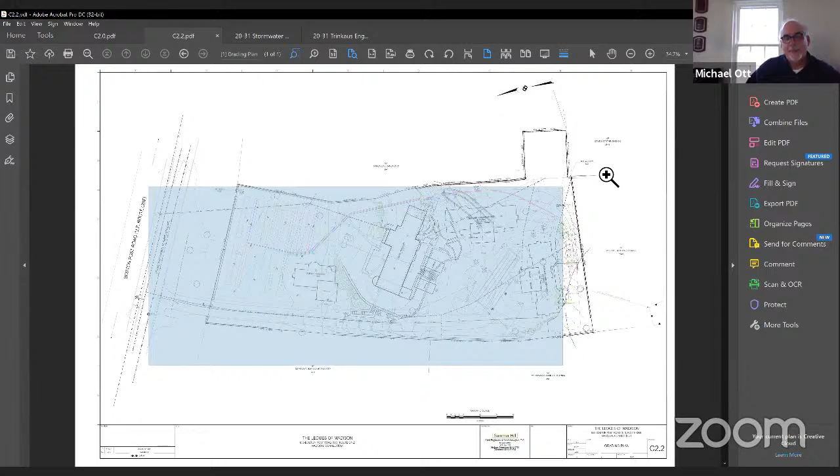So the proposal is, and again I'll do this as quick as I can, to widen the existing driveway, which varies in width from 9 to 10 to 11 feet today. The proposal is to widen it to 18 feet, with a 2-foot reinforced shoulder on the east side, the internal side to the parcel, to accommodate emergency service responders, specifically fire apparatus, in their operations.

This is not the cleanest drawing to look at, but the proposal is to renovate the existing estate house, removing a good portion on the east end — the project architect can explain how much. The footprint won't otherwise change, and the renovation will create 2 residential dwelling units inside it. A new building will be constructed out front with 1 residential dwelling unit, and 2 new identical buildings will be constructed in the rear to the south, each with 2 residential dwelling units. The garage apartment building will also be removed.

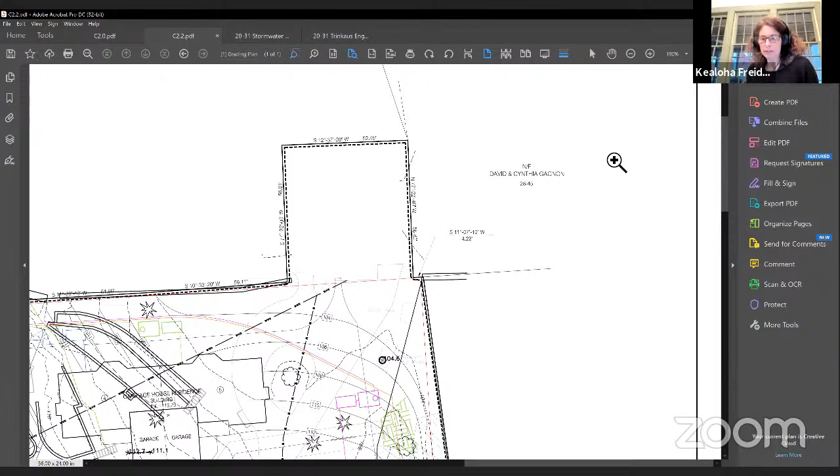Yes, absolutely. If it's as close as 60 feet, it would extend onto the property some 40 feet. We can't tell the exact extents of whether it would be an arc or what area it would cover.

Let me shift to a different sheet. Hopefully you can see the outline of the existing garage. Okay, so we know that you're absolutely correct.

Because we don't know where the limits of the wetland are exactly, we don't know where the limits of the 100-foot upland review area are. But it's very clear that at a minimum, a portion of this building is within the 100-foot upland review area. In addition, a portion of this pavement out in front of the building is within the 100-foot upland review area. That's the existing plan.

If I switch to the proposed plan, we know that the landscape architect has proposed, when this building comes down, a community garden and seating area in here. Certainly a good portion of the demolition of the building and its removal, and then the construction of the seating, garden and seating area will be within the 100-foot upland review area.

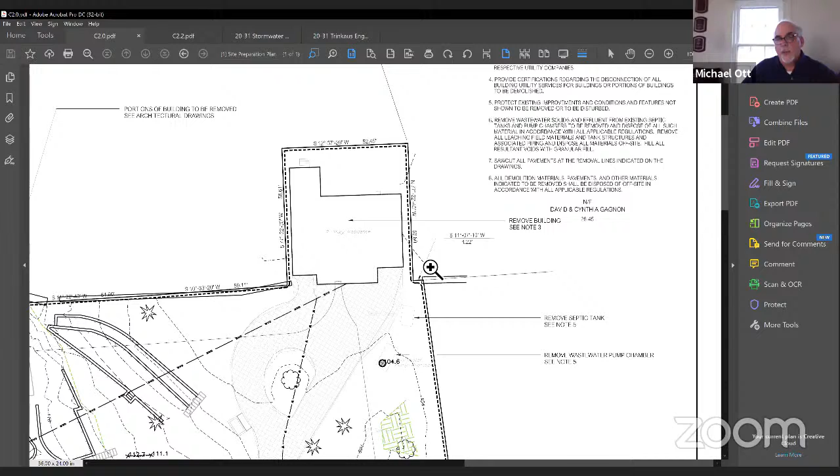In addition, let me go back and switch, it's easier to see. This pavement drains roughly in this direction, and surface water runoff from it also heads toward that wetland on the adjoining property.

In the proposed condition, and I talked about this in the stormwater management report, we're removing this building, so we're removing this impervious surface, and constructing a community garden and seating area. I'm quite sure the landscape architect has said the entire surface area will be permeable. We're also removing the pavement out in front of the building and turning it into lawn, removing that impervious surface too.

What we're doing is taking the closest impervious surface to the wetland, which we estimate at 60 to 70 feet, and that's the building. We're removing it and the pavement, pulling that impervious surface back so under the new proposal, the closest impervious surface would be this portion of the building, roughly approximately 130, 140 feet from the wetland.

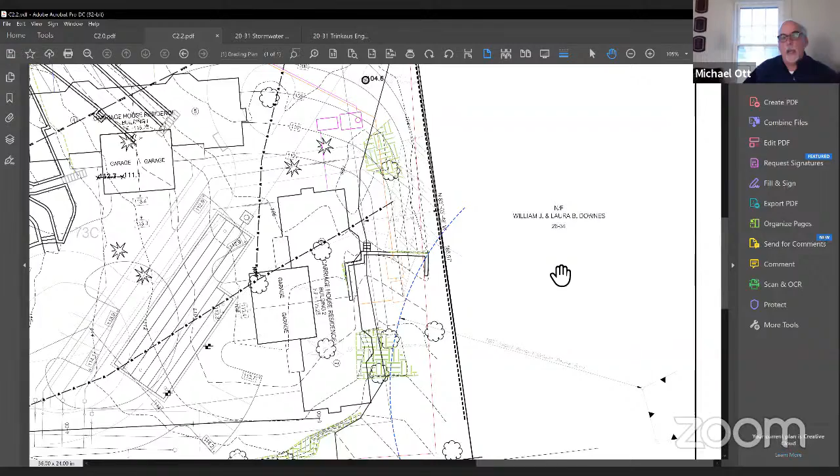The remainder of that I'll leave to Rick Hosley and Dave Ward. But I wanted to make clear that now that we have this detailed survey and have been out in the field taking measurements, we've laid out the corners of these buildings to see exactly where they fall, and shot elevations to see where the first floor will be and where the bottom of the footing will be. We know this rock outcrop is not touched, and the amount of rock that has to be removed is much smaller than we had estimated.

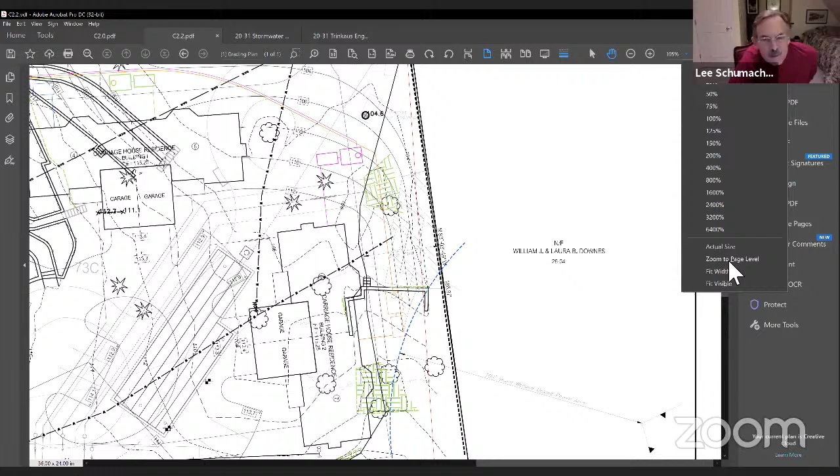Mike, this is Lee, and I apologize, I wasn't on the site visit, and I think I may have asked this question 2 months ago. Where does the water drain? How does the water drain in that southwest corner now?

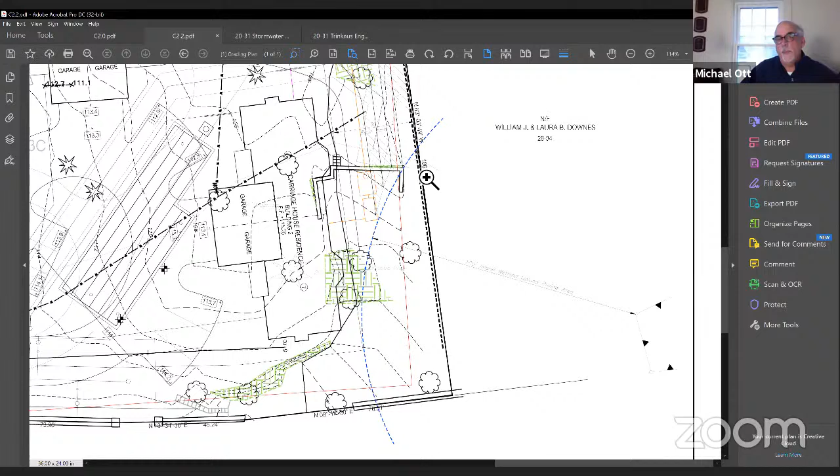Best I can tell, Lee, if you can see these ground surface contour lines, these dashed lines, surface water runs perpendicular to them. So as you can tell, it would drain as I'm tracing with my cursor, in that direction. I guess that would be southwesterly. Can't tell you what happens on the adjoining land because we don't have topography, but as you can see, we've called for a sediment control barrier at the property line during construction and until any disturbed ground up here has been stabilized. Thank you.

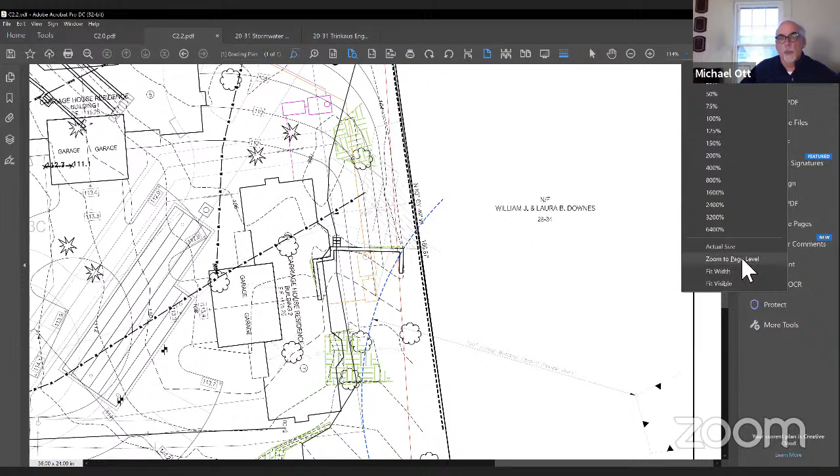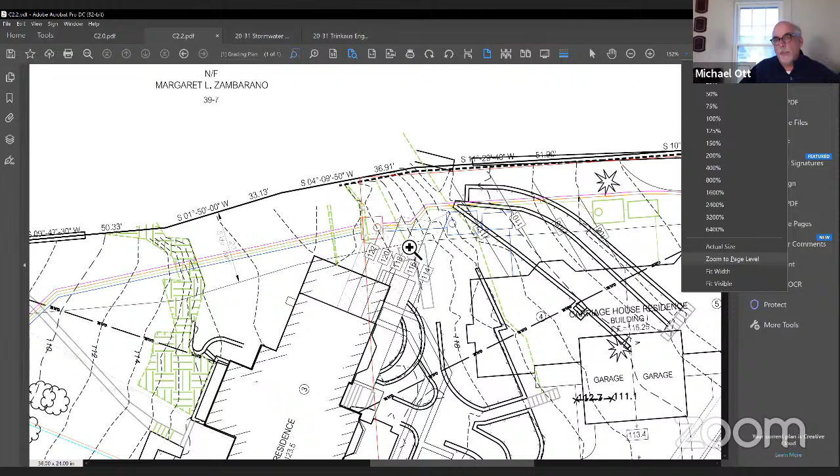So let me talk about the last area of rock removal, up at the east end of the building. We do not think it has any potential to adversely affect wetlands, but I'll leave that to Rick Hosley and David Ward also. This rock removal is to get the wastewater effluent force mains, junction chamber, and gravity lines down to the leaching fields in the front. We spent a lot of time up here taking measurements and looking at this, and Rick will speak to this in more detail later.

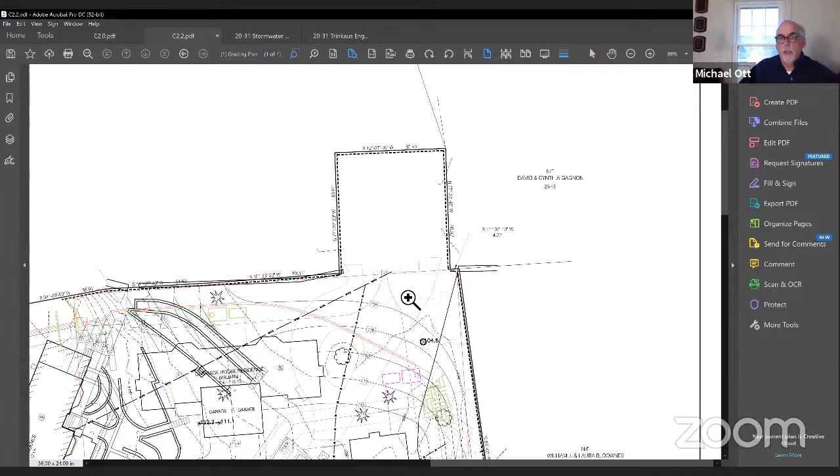I think we've covered the work required here at the southeast corner of the property with regard to this off-site wetland. The last thing I wanted to talk about is stormwater management. I mentioned it briefly, but I'll talk about it in more detail. So before I do that, any other questions?

Well, I have a question. This is Tom. On the southwest corner, we're talking about an area where there's going to be rock removal. There's a large tree right on the borderline - is that tree going to remain, or could it help stabilize the ground?

It's inside the blue 100-foot marker. I'm glad you brought this up. We looked at the trees, and maybe Rick Hosley can help me. We counted them and determined that 6, maybe 7 trees would have to be removed. I believe this one can stay, as well as 1, 2, 3, 4 - that makes 5. These 2, plus the 3 in the building, of course - it seemed to me there was 6 or 7. A couple of them were not in good shape, also as we stood there and looked at them. So it's a half a dozen or so trees that would have to come down. Thank you.

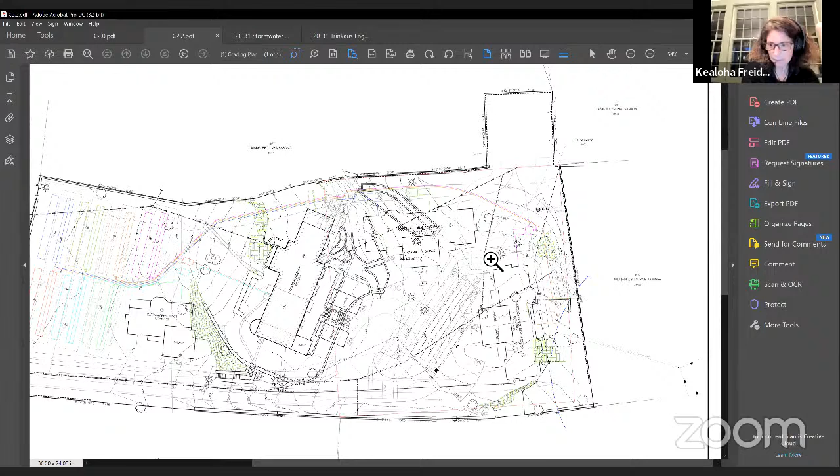Okay, I have a quick question, Mike. For your galleries, are you sure you can put those all in? I know you've done test pits, but is there enough space for what you've sized? Because there's bedrock and ledge there, and I'm sure you haven't dug test pits all over the place, but what would happen if you encountered bedrock and couldn't put all of those galleries in? Right, so good question.

I think we've done enough test pits. What we haven't done is a good enough job documenting exactly where they are. We will do that, but I feel comfortable being able to construct the galleries where we show them. A good portion of them, just like Carriage House number 2, will be located in fill. That fill has to be chosen carefully and placed carefully. These drawings are permit drawings, not construction documents, but that fill material has to be chosen carefully and placed properly. A good portion of these galleries are in fill, which actually elevates them - the bottom is above the existing grade for a good portion of them.

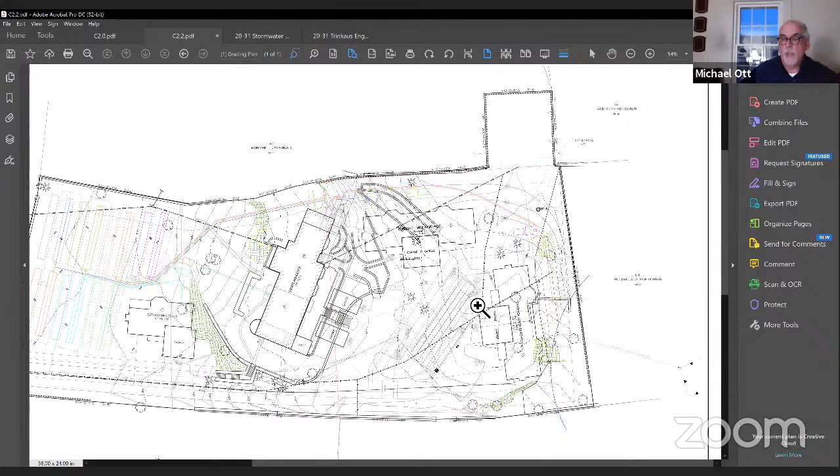So what would happen if we ran into a spike in the ledge, a knob of rock that comes up unexpectedly, somewhere in between our test pits? I think there is some flexibility in the area where we did testing in this existing grass island. In fact, if you go out there tomorrow, you can see the test pit has actually settled - you can see evidence of where we did it. I think there's some flexibility where we could relocate galleries in this area.

I'm set on questions, if you want the next person to come talk, because oh my God, it's already 8:08. I apologize, as you know I don't like to talk this much. I think you did a good job on it.

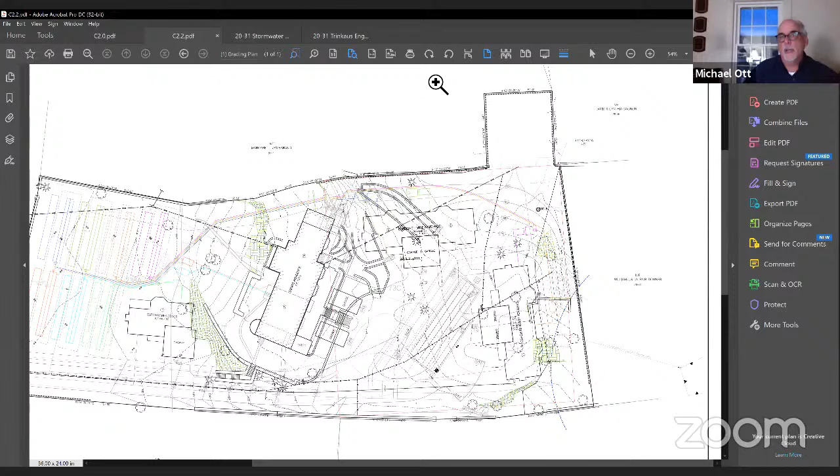Thanks, so I'll stop sharing my screen and turn it over to Rick Hosley, if he's still with us. There it is, I am Mike, and I apologize - my internet has been a little unstable tonight, but fortunately I was able to catch your report.

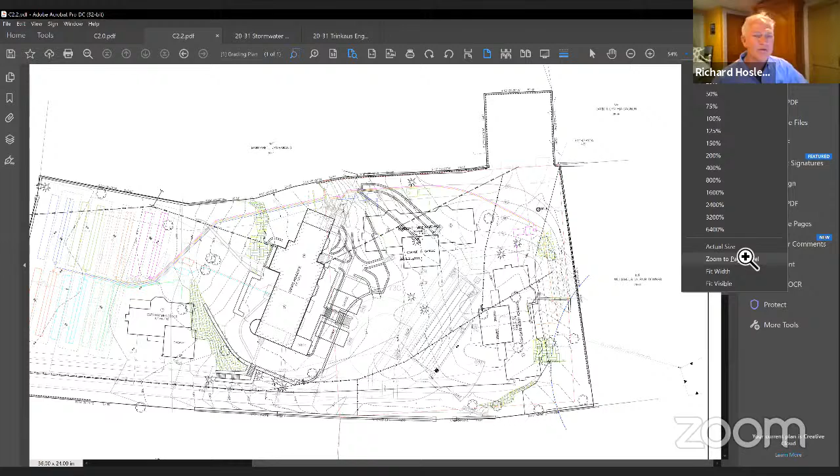I am going to ask you to share your screen again and get back to some of those locations where the rock is, so we can identify in more detail the exact areas and some suggestions we had about alternative methods to blasting for the consideration of the applicant. Specifically, the applicant has asked us for alternatives to blasting.

Again, my name is Rick Hosley. I'm president of Realty Securities Consulting and the Hosley Companies. We're a 3-generation small company of 98 years. I'm the technical director for the European Federation of Explosives Engineers, and past president and technical director for the International Society of Explosive Engineers. If you recall my last presentation to this group, I had a PowerPoint that demonstrated the topography and the jointing, which is very significant on this property because the jointing - pre-existing cracks in the rock - really dictates not only how the rock is going to break, but in what directions.

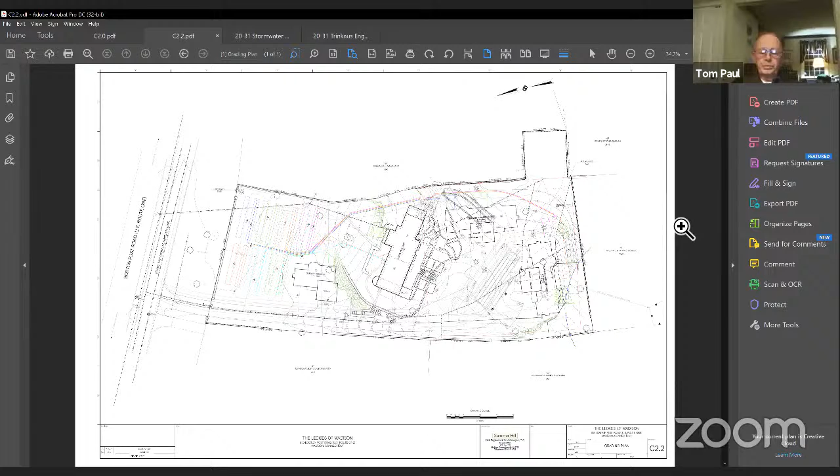We also demonstrated in that previous presentation, which is on YouTube, that explosives energy does not migrate outside the proper blast design, and it will not shift rock outside the blast design into the rock mass.

To maintain that practice and principle, we have submitted a report called Focus on Execution and Impact of Blasting Affecting Wetlands and Adjacent Structures—a guideline, a checklist, for a contractor who would work on this site and similar sites. I think that would be important to review, and I'm assuming the board has received that.

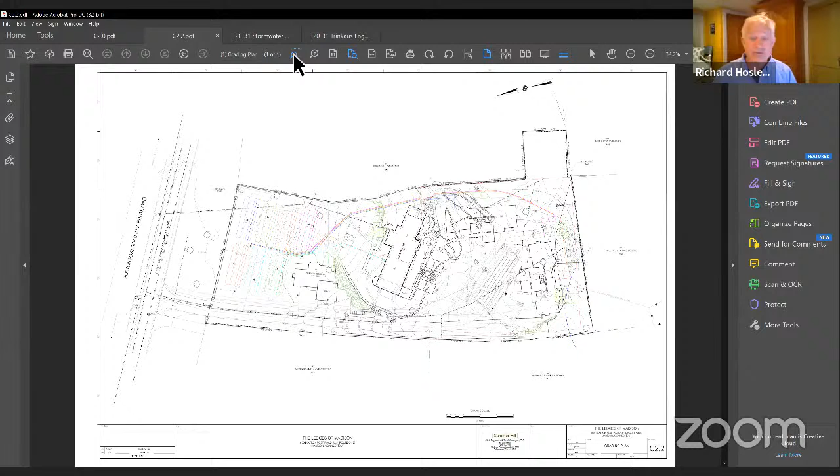I'd like to start, Michael, if you would, by zooming in on carriage house number 2 and defining in a little more detail what we talked about with the rock area there.

If you notice, as we zoom into that area, you can identify the 100-foot inland wetland upland review area. Mike, if you can zoom into that particular spot and bring it a little closer, we can determine from your map and scale that the upland review area is approximately 4.5 feet off the proposed corner of carriage house number 2.

That travels through the green area, which is identified as a rock outcrop—an exposed rock outcrop.

What's significant about this area is that approximately 10 feet of rock needs to be removed north-south to build carriage house number 2. But you actually have to go outside the foundation of carriage house number 2 to the south, an additional 4 feet, for working room for the forms.

So essentially, north to south, approximately half a foot outside the 100-foot inland wetlands upland area would be the edge of cut to install the foundation for carriage house number 2.

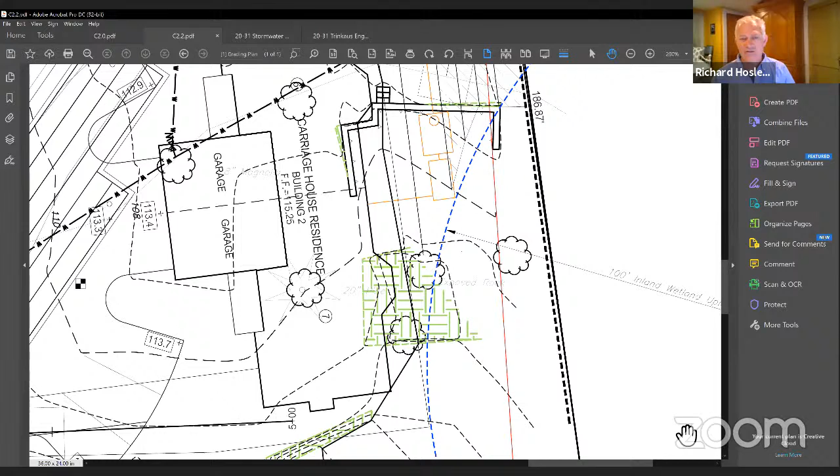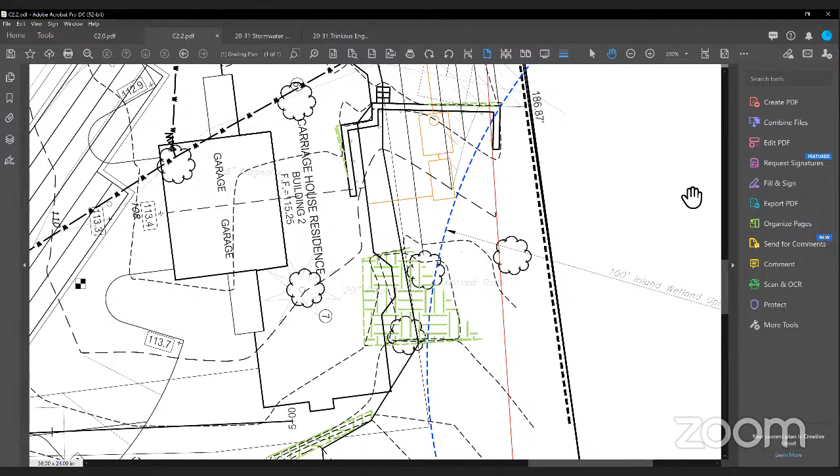In the interest of trying to continue to make progress, I'm going to suggest that we have David Lord speak, who I believe would be our last speaker that we intend to present tonight. And if Rick can straighten out his internet, we'll talk to him. David, are you prepared to proceed with your remarks at this point?

Yes, I am. Good evening. For the record, I'm David Lord. I'm a certified soil scientist and environmental consultant. Company is Soil Resource Consultants of Meriden, Connecticut.

I believe in the application package documents, you have a report from myself to Mr. Ott, dated April 15th of this year. It concerns the findings of an on-site investigation, which I conducted on March 26th of this year, for the purposes of determining the presence of any on-site inland wetlands areas on the site.

I looked at existing deep test hole information and soil logs, then did a series of holes along the southeastern corner of the site, which was closest to the known offsite wetland. Found no indications of any high groundwater table. Soils there were excessively drained to well drained, fine sandy loams to sandy loam soils, and I went down to depths in excess of 3 feet with my soil auger, which is about the extent of what my hand equipment can do.

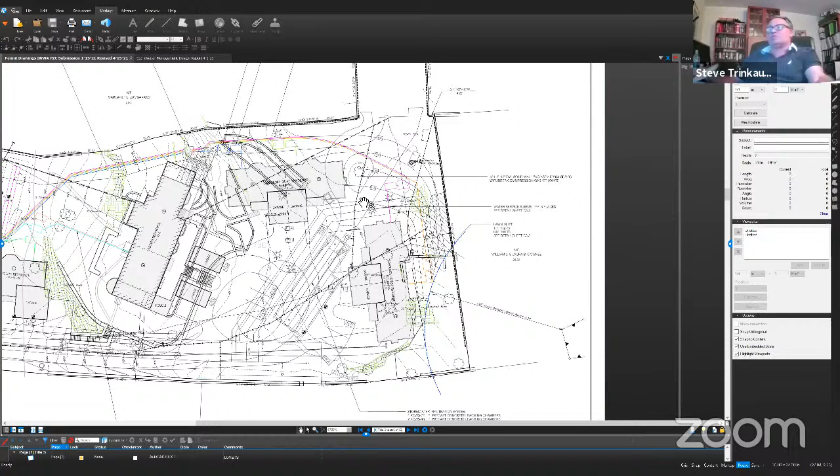I'd just like to check that if the commission received George Logan's wetlands investigation report. I know I filed it, and I think it wasn't listed with the application documents - it was listed with some general form documents. I just wanted to make sure that got into the record for the commission, because the commission can then see for themselves where the wetlands are and look at the contours. You can see that if the stormwater or groundwater flow is generally following the contour or a perpendicular line to the contour lines, you'll be able to see that the water flow goes toward the wetlands that he defined. I just wanted to check on that.

But with that, that concludes our technical presentation to the commission. And we'd be, of course, happy to answer any questions that you have at this time. I know it's been a long time listening, but we're done for the moment. Thank you.

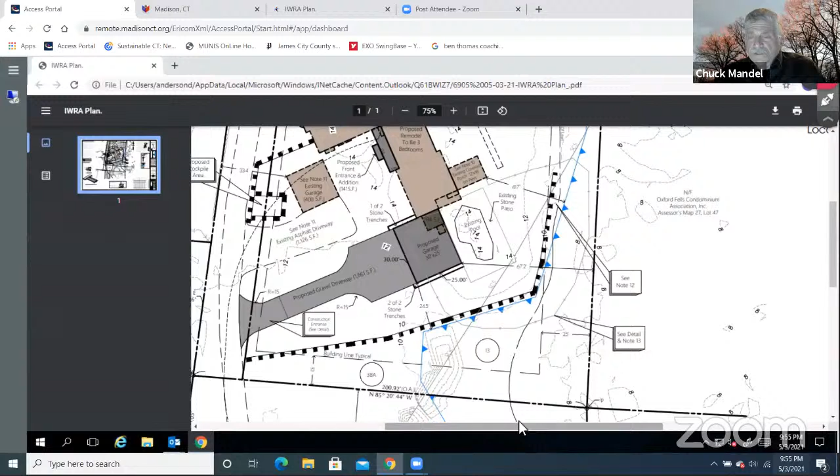So Chuck, this is the plan I think you sent me via email late today, I have up on the screen. Okay, yeah, so there was just note 12 and note 13, which I had added on there, which talks about the fencing and the removal of invasives. I didn't get a chance to put the actual plantings on there, but that's something I would hope I could do with John or with the commission if they wanted to make that a condition of approval. And we could certainly give them a plant list and some quantities and show those to John.

Yes, that would be great because you are right up on the wetland boundary there. So hopefully your plant list can be hopefully native species. There seemed to be a fair bit of moss back there, so I'm not sure how open it is, I guess it's going to depend. And you're not taking any of those trees down? No, as we discussed at the site walk, the trees are to remain.

And the fencing, it's kind of hard for me to see on this, but you're going to take the fencing out and move it, and hopefully leave a little space underneath for things to move. Although I'm kind of bummed because they're going to move into the pool, but maybe they won't.

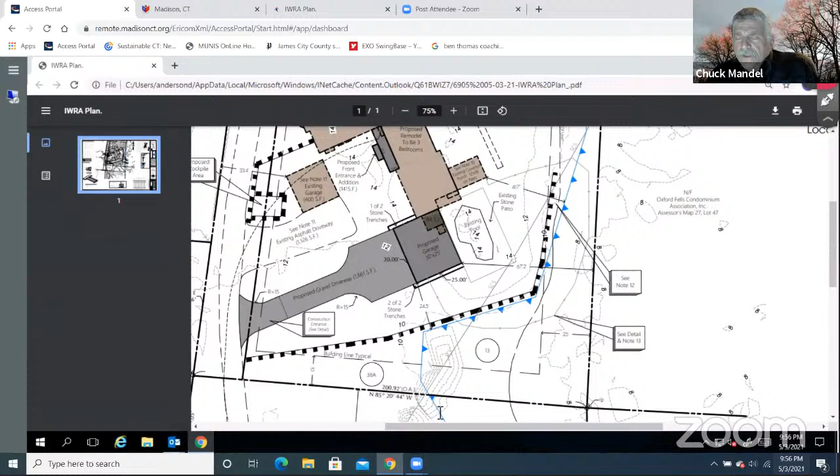Dave, if you go to the lower right corner of the drawing, we do have a fence detail there. I did discuss with the applicant raising it up as you suggested, but he has very small dogs and was concerned they'd dig underneath and escape. So I tried to convince him to raise it, but he was very concerned about the dogs escaping.

As you can see, there's almost a 4-inch gap between the bars, so smaller amphibians could get in there. But you don't really want them getting into the pool area anyway, and it was a pretty steep slope for them to climb up. Well, frogs can do that, salamanders can do that. They could certainly get through a 4-inch gap. What you won't get through there is turtles, or maybe only baby turtles that would fit, I don't know.

What do you guys, the other agency members, think about the fencing? Is that going to be a metal fence? Yes. Or is it going to be wooden? This is a metal fence right here.

But it's not the mesh fence that's there today, so it's like an upgrade. Correct, that fence is going to be removed. Actually, most of that fence was actually in the wetlands itself. It'll all be taken out.

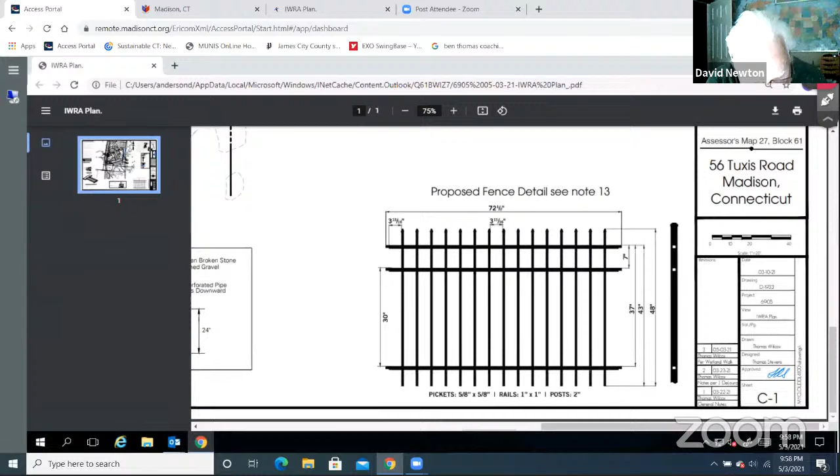Is there anything else? I think Dave, you were at the site walk. And Tom Hall, I think you were too. Yes. Okay, yeah, I missed it. I'll defer to you guys.

I'll make a motion we approve 21-12 as presented, given that the fence they're representing now, and assuming that the plant list they gave us is acceptable to John and Dave. I haven't seen it. We didn't submit one yet. We will go over that with John.

I second the motion. Any other discussion? All right, so all in favor of application 21-12, as discussed in the motion, say aye, raise your hand. Aye. Okay, great.

And you can check in with John DeLaura on the plant species, and we'll hope the amphibians stay away or migrate past the pool. Thank you.

All right, so our next application is 21-10, 259 Mungertown Road. Yeah, that's me again. Agent for the applicant, Chuck Mandel. Sean O'Connell is the owner, actually, and this is at 259 Mungertown Road. It's at the corner of Mungertown and Old Schoolhouse Road, at the very end of Mungertown, almost the third house from the end of the dead end where Mungertown Road ends. It's a very long, narrow lot.

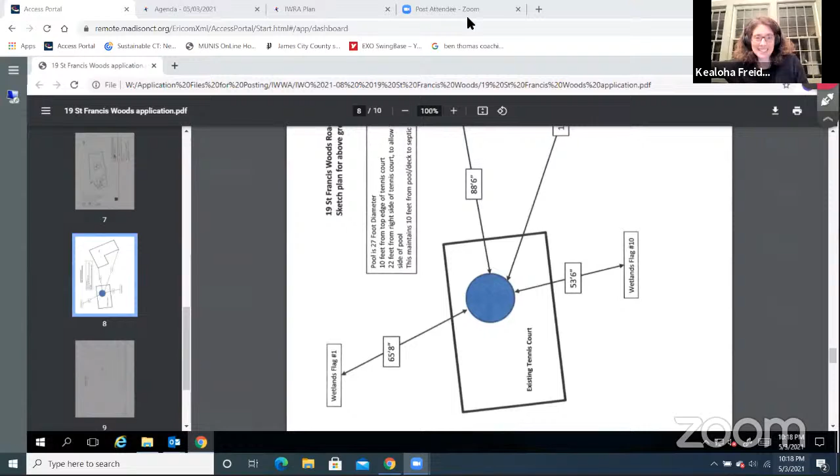Good, yeah, great, good job. And look how fast you did that. Yeah, Dave had to kick me along a little bit. That's all right, I was taking a lead from everybody else before me. No, I was just pontificating. Set a good example—I gave you an out, you didn't take it. Right.

Okay, well that's great. All right, so with our email we had our regular meeting minutes from April 5th, as well as site walk minutes from March 20th that we need to approve. I've read both, I didn't have any comments.

Okay, Dave, I have one correction. On page 4, application 21-12, my name is Newton, not Newtown. No, that happens frequently, so that's the way it's shown, Newtown. So I just haven't changed my name. If you would. Okay, that's it.

No, that's good. Are there any other comments on either of those minutes? No. Going once, twice. All right, I'll entertain a motion to dispose of these.